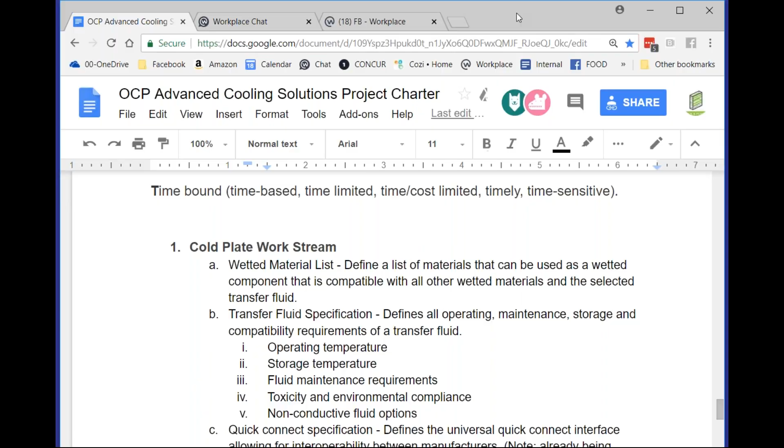So before I get started on that, do we have individuals that are interested in the cold plate work stream online? It's hard for me to tell. Yeah, you bet. Cam from CoolIT, sir. Hello.

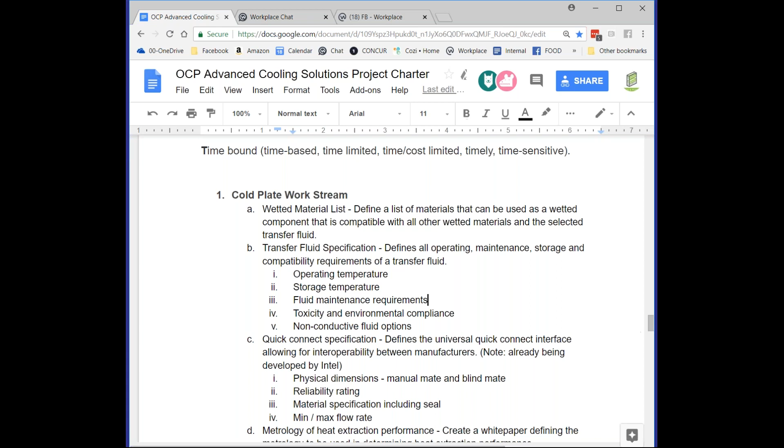Okay, I think you were actually the one that made most of these edits in here. All right, so can you guys see? I guess you guys can see my screen now. Looks like, I can't. Yeah, we can see it. Okay, good.

Last time we didn't get much time to look at this, so we can go through this real quick and look at what we've added since then for the cold plate work stream, and see if we have any additions or edits or subtractions from what we've added here.

So one is your wetted materials list, which certainly makes sense. Transfer fluid specification, including operating temperature, storage temperatures, toxicity, okay.

So this would be, I'm assuming we would want this for a whole roster of different types of fluids, right? Yeah, well, that's kind of the direction that the open harmonization group was going. There wasn't really any discussion on non-conductive fluids, though. They were really trying to limit away from that. Go ahead. I was just going to say, I'm not sure of the value of adding that at this juncture. I mean, I don't think it's very widely adopted. Using the non-conductive fluids? Yeah. Okay.

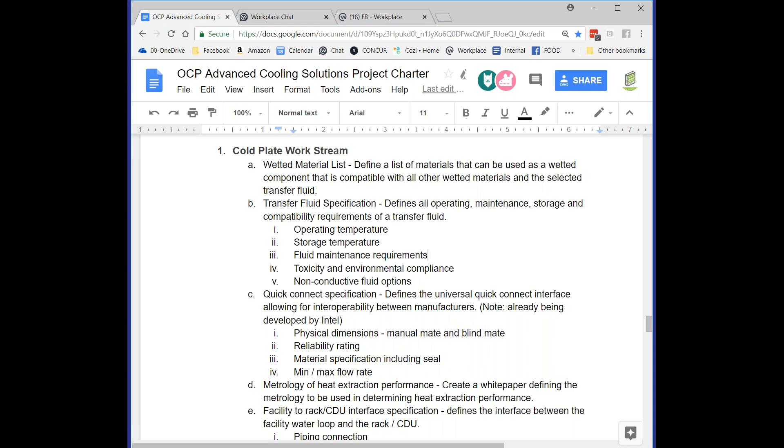Steve, sorry, before we move to metrology, I think Rolf was saying that at least with the quick connect, to kind of focus on one design. I'm curious to know if one design would be able to support both pumped single phase and pumped two phase implementations, because this has been brought up before. It needs to be wide enough that it accommodates both pumped single phase and pumped two phase for whoever's interested in whichever area. Just a thought. That's a very good point, by the way, yeah. Agreed.

Okay, looks like my screen should be back for everybody now. Does everybody agree with that? Yep, I can see that. Okay, cool.

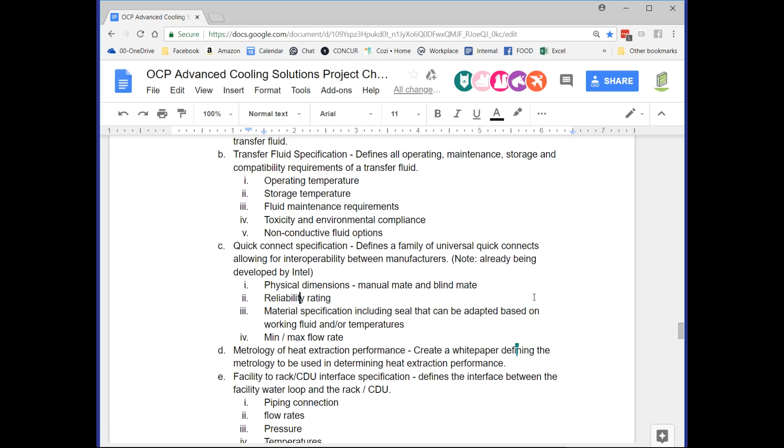Okay, let's go on to the metrology. I'll put the link here in the chat. A question about the remark just now, I don't know who made it, about the two-phase variant.

Again, this is not my level, my area of expertise, but isn't it so that the two-phase approach would, in cold plate technology, predominantly be a closed system anyway? Would that even require quick connects in that way? Would that not connect to a more generic cold plate environment, or are there so many variations on that as well? I guess the point is...

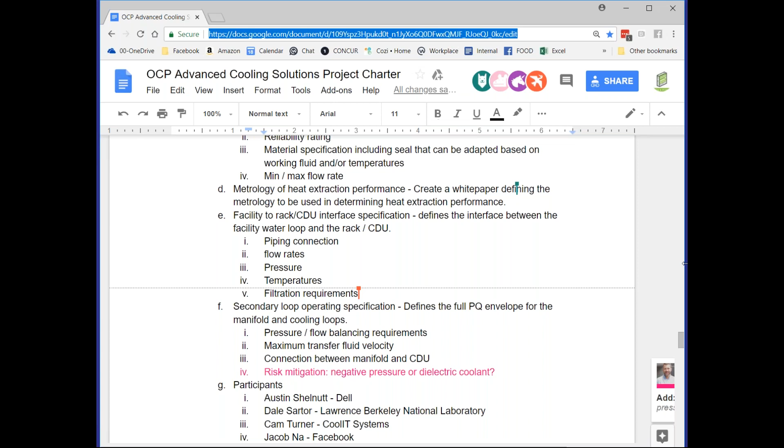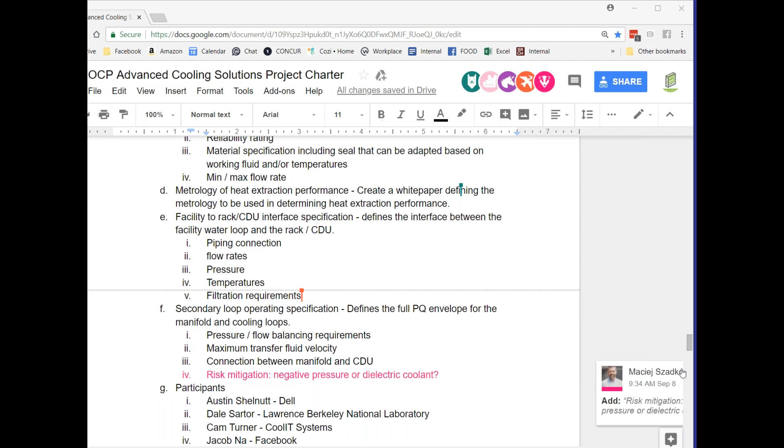If you should be able to service the servers that the cold plates are in, then either on the front side or the rear side of the chassis, there should be a way to disconnect the secondary loop with the loop that's within the server, right? So my question is more along that point. But that secondary loop, is that not very similar to water being fed towards the chip with direct to chip? Yes, but I was asking more along the lines of the pressure rating, right?

Right. Okay, I'm also not an expert in this field, but from the aspect of keeping it open to accommodate both versions, I was just curious to know if a single design would be able to cover both variations. So sounds like you guys need a more agnostic expert on that, I guess.

I know someone who I can try and link up to you guys. Yeah, I think if we can bring someone in to help with this, that would be useful, wouldn't it? Yeah.

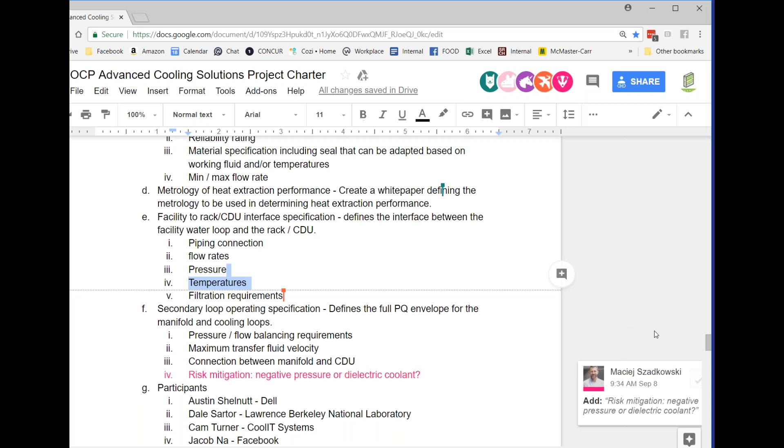Thanks, Rob, for the comments, by the way. Yeah, no worries. It's the purpose of being here, right? Yes, it is.

All right, so how about metrology now? Ready to move on to that one? So I believe this is a proposal that we had previously as well, to kind of develop a white paper defining metrology. I think that would be interesting if we can.

I personally don't know if I've got anything I need to add to that.

The interface between the facility water loop and the rack - is that not something that would fit better in the harmonization layer for the three different liquid approaches? Yeah, definitely. Ideally it should be. I don't see any reason why it can't be.

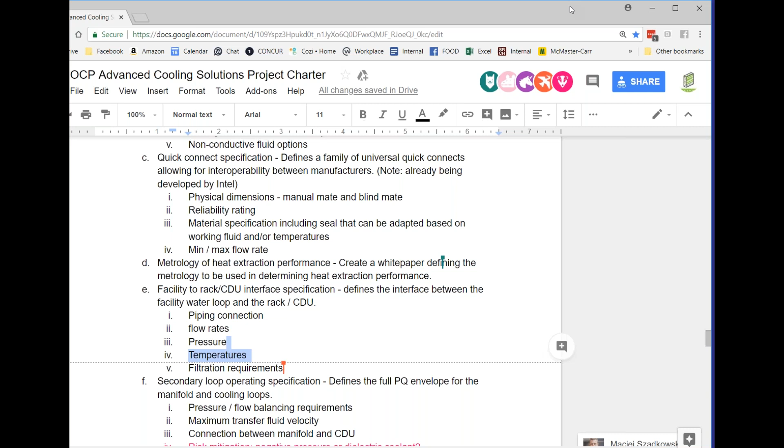Because that's where the value is of putting these different liquid technologies in one big work stream, so that you can have in one facility rear door cooled racks, direct to chip, and immersion systems all connected up in a similar way, maybe with some different pipe sizes since some systems can deal with higher energy loads than others. Generically, I'd suggest we put that in a more collaborative approach where we spec standards for hooking up to facility infrastructure.

So I agree with that statement as well. We would basically be extracting this out of both the rack door and the direct-to-chip specs, and putting that into a harmonization spec. Does anybody see any reason why we can't do that?

Is there already any type of water interface defined in anything related to OCP at this point in time? No, there's nothing from an OCP standpoint. Also not for data center design for CRAC units or air handlers, anything like that? Zero? Just the temporary specs.

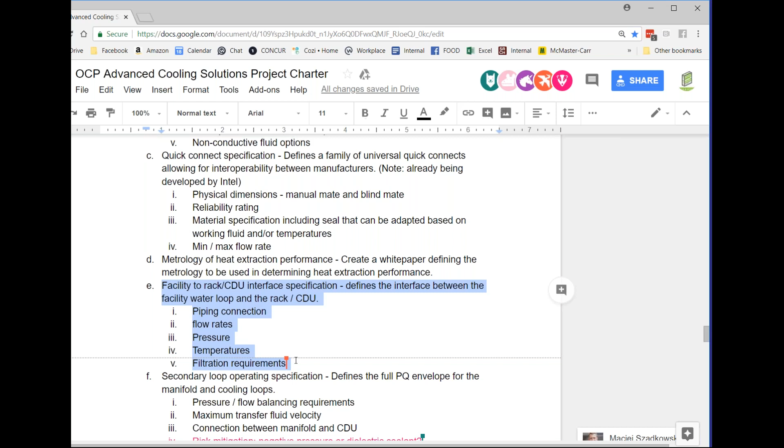I'm sorry, I didn't hear that. There's all the ASHRAE specs, right? Right. So I'm not completely aware of all the detailing in the ASHRAE specs. I know it goes pretty far, but does it go as far as defining interfaces like BSP or anything else? No, I don't think so. No, neither do I.

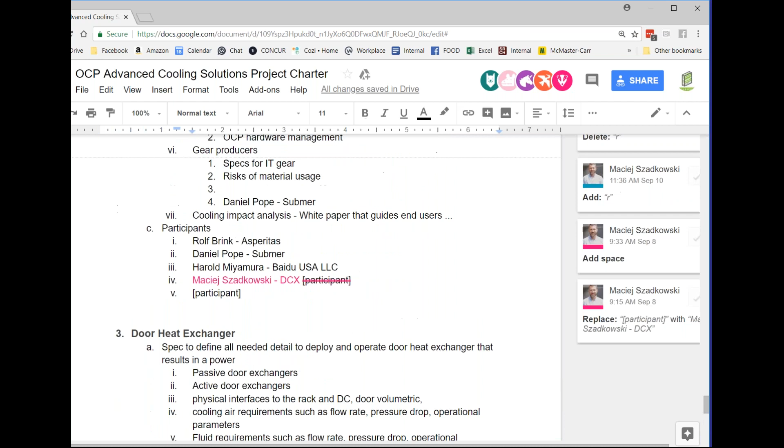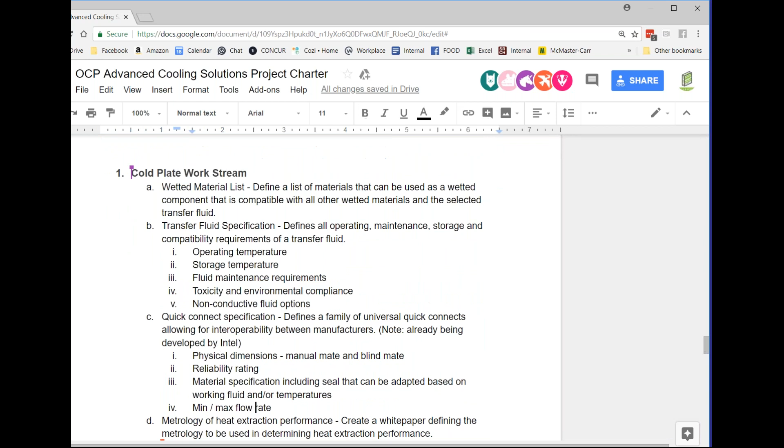I'm sure we can find plenty of experts on that. Does anyone know what the standards are that are used in the United States? Is there a difference between US and Europe when it comes to defining standards for pipe measurements? Here in Europe we mostly use BSP, the British Standard Pipe for inch diameters. But is the US using similar metrics?

Yeah, this is Cam with CoolIT. I don't think we've seen any standards per se, but are we all talking about the major connections from the under-rack or over-rack plumbing to the facility, the CDUs? So yeah, to the CDU or from the CDU and its plumbing out to the water main, at which point you're talking about some very large connections that are typically flange headers of some type that are bolted together.

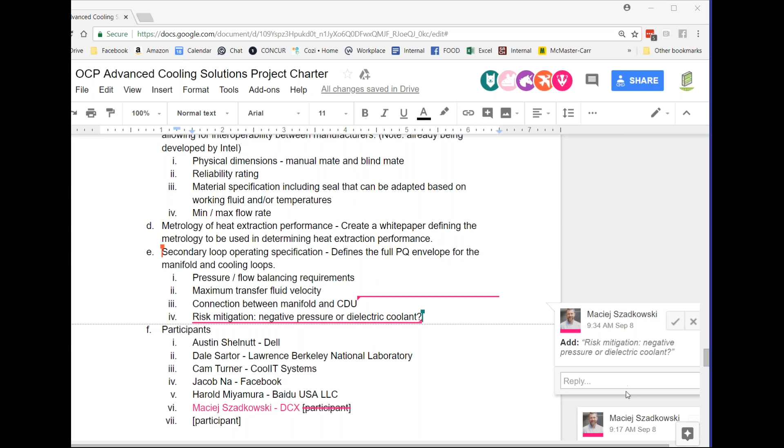So obviously the different solutions will have different sizes, but if we divide the different energy loads into certain diameter specs, then at least there could be a standard based on types of interfaces - whether you use flanges, threaded connections, or not - these types of decisions or descriptions. That could be something we define on a broader, more generic level where you can incorporate different sizes. I think you could for sure.

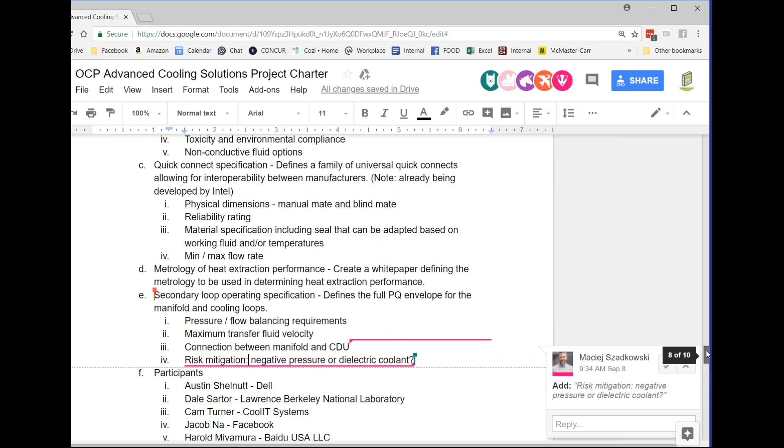Our experience is that it's been a range of different connections. On smaller connections we've seen different threads. We see a lot of sanitary clamp flanging around the secondary system, whether for the CDU or from the CDU to the water main. I guess so long as it was somewhat broad - typically it's the building management group that will help define what connection they want in their facility based on other existing connections, and they follow that track.

So I like the idea of trying to define a connection that everybody could follow, but wouldn't want to interfere with the building management groups and their ability to also spec and service connections. Yeah, but if we define a standard for all the liquid technologies we supply our kits with, then it's always easy to put an adapter interface on anything to accommodate any exotic infrastructure.

We're dealing with similar approaches from our end. Our systems are standardized on 1-inch BSP pipes with threaded interfaces, and anything the facility would like to see differently, we just put on an adapter. For us it's quite simple to change the standards. The interface to the water infrastructure could be relatively easily standardized for most products, and then having adapter fittings for anything else might work.

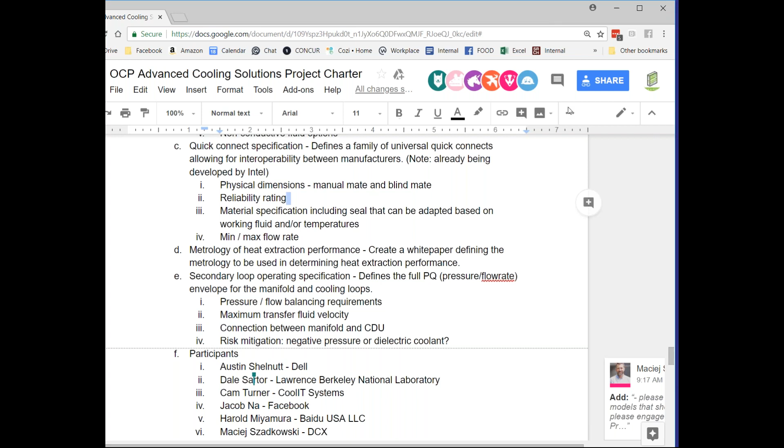Yeah, obviously with the pump there's a reliability aspect associated with that. I was thinking more along the lines of pressurizing the manifolds and then trying to understand reliability in terms of how the quick disconnects interface with the manifold, and what is the impact of, let's say, suddenly pulling out 3 servers in quick succession or something like that.

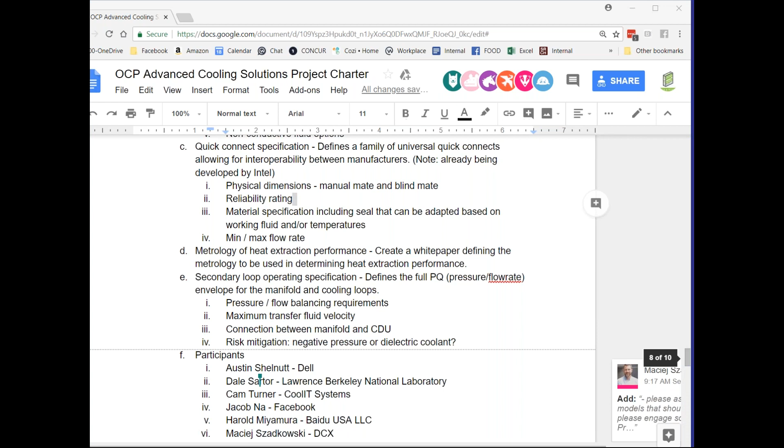Yeah, I'm willing to support it if you have some stuff that you're looking at, but I'm not sure. Yeah, I was just curious to know if there's anything out there already published, already written, that could be referenced to a certain extent. Not to the best of my knowledge. Okay, thanks.

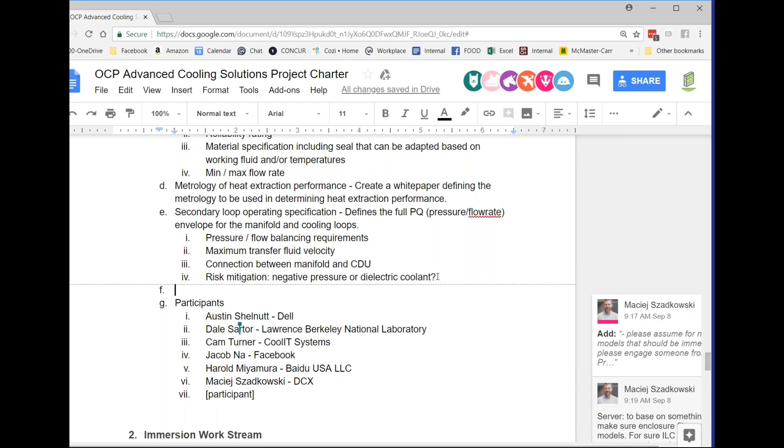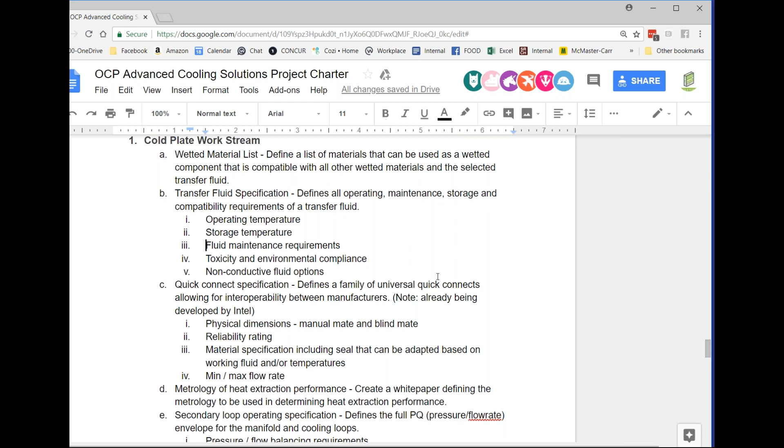Okay, anything else on secondary? Okay, in that case, is there anything in general that you feel is missed, at least to start with, for the cold plate stream? That seems like a pretty good set to start with.

Okay, then I would say our first pass there on cold plates is complete. So we still have a good 10 minutes left. Is there another topic you guys want to add to the agenda for today?